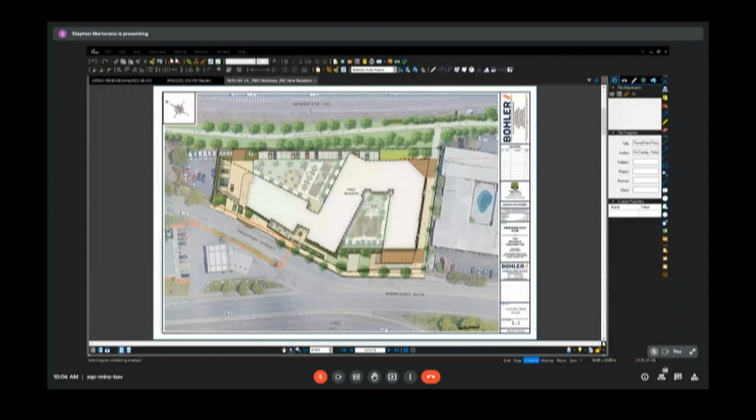So this is a top-down site plan of the project. Is everybody seeing that now? You're good. Okay, great. So proposed residential building here. This is 780 Morrissey Boulevard. To orient you, Morrissey Boulevard's on the bottom of the page. You have Freeport Street, city ownership identified by this orange line, which is currently under the custody of MassDOT, but that portion of Freeport is being actively transferred back to the city, which is why we're here today talking about the frontage along Freeport. Just to orient folks, the rest of this is under DCR's control. Morrissey Boulevard up to this point is DCR, and on the backside you can see I-93, so MassDOT's jurisdiction is on the backside of the project.

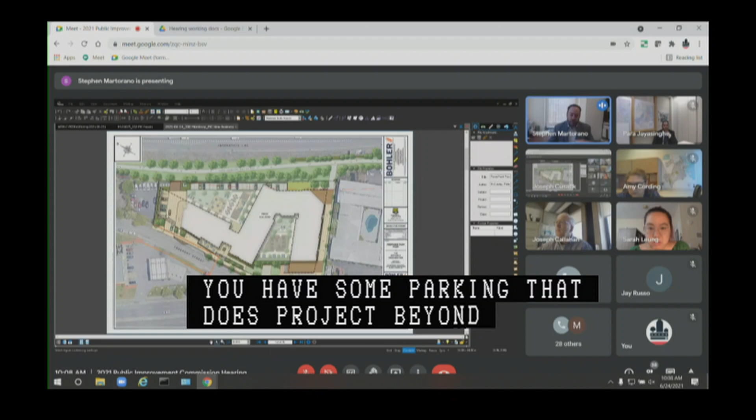The residential building here has a couple legs to it. We have some upper level podiums. These are 1 story up. Most of the parking is housed under the building here. We have some parking that does project beyond the building there, and some covered under an overhang entrance here as well.

I'm getting feedback. If folks could mute, that might be good.

The frontage today, there's not a sidewalk along Freeport Street along our frontage, so we're introducing that. So this is all new. We do require an easement, which is the first action of the agenda today. So we are proposing an easement to allow this sidewalk frontage zone to develop.

So we have street trees, a furnishing zone along the Freeport side. Then behind that, we'll have generally an 8-foot sidewalk as we connect into this portion of the property line here. It does get down to 5 feet, and I'll show you in future slides how we accommodated that tree.

This is a slightly out of date graphic. It doesn't show the 2 trees that we're maintaining for the parks conversation, but then these are all new trees that we're introducing. These ones here are in DCR jurisdiction. We are introducing a new one here in City of Boston jurisdiction. So that is an overview.

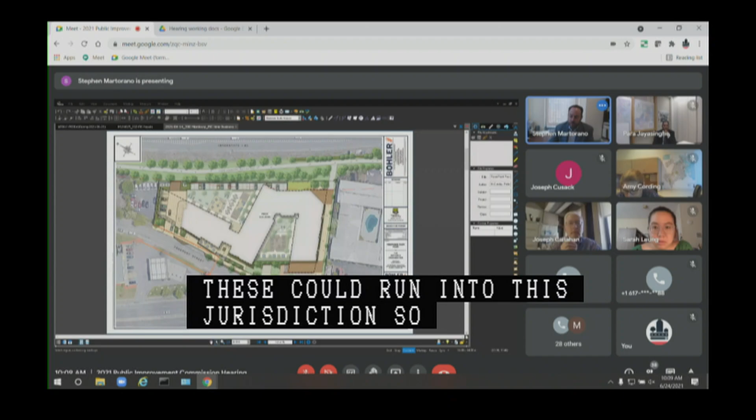We do have a blue light station that we're proposing here. We have a connection that we're proposing down this property line, and then coordinating with DOT and DCR to extend that connection to this bike lane. This is a proposed DCR DOT project here to put this bike path in. So as that comes online, we're requesting the ability to connect into that from our property as well.

And we're developing a large bike plaza area in the back adjacent to our bike room. So really trying to make this a very bike-centric project, in addition to the pedestrian accommodations we talked about along the street frontage, these connections to this multi-use path that DCR is creating.

And DCR is in the process of designing a lot of improvements to Morrissey Boulevard. Those are still under design, but we are accommodating a 10-foot sidewalk here per their request, which is the beginning of what they envision as another multi-use path right along the side of Morrissey Boulevard. So a very different area in the making, a lot of great changes coming beyond just this project. We've had lots of conversations about what the future looks like in this area. I think there's a great opportunity for a much more bike-centric environment than what you have down there today.

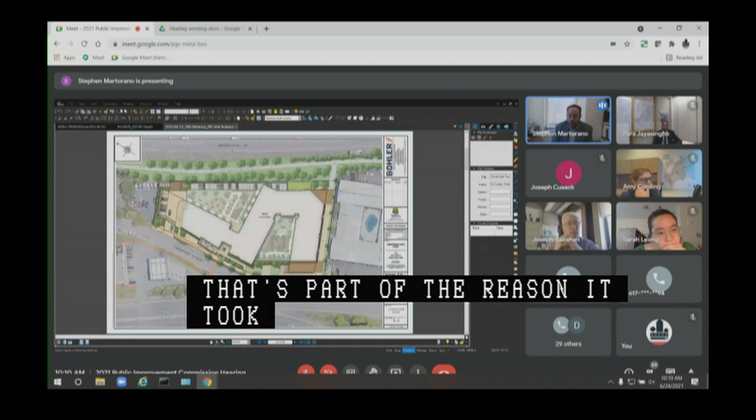So that's a broad brush overview of the project and the area, and there's a lot going on, which is part of the reason it took a while to get the details worked out on what our frontage zone wants to be. But we think we've talked to all the stakeholders and are pleased to introduce the project again and talk through the specifics with the commission today.

Thank you, Steve. If you could have your staff give the very specifics of the first item, which is the pedestrian easement. Yes, so switching slides here. Did that switch with you?

Yes, good. So, as I mentioned, to get the width we need along Freeport, we are proposing a pedestrian easement. This is the beginning of City of Boston jurisdiction, and there is sufficient width here to get the full complete streets, but as you get down, we needed a little bit of the private property in here. Looking at the dimensions, it's up to a little over 4 feet wide. Again, that's the tightest pinch point where we're trying to keep an existing tree right here. So we're pushing the sidewalk in, and we've extended it all the way to the property line, even though the sidewalk doesn't go there today.

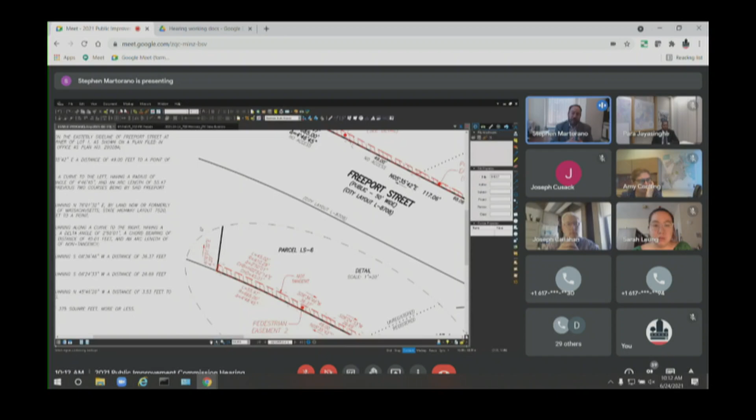You'll see that in the detailed graphics, but this would give the opportunity, if MassDOT owns this next parcel and wants to also provide a similar easement on their parcel. We just thought it made sense to bring our easement all the way there for future expansion and continue the complete streets as DOT does whatever improvements on their property. And they are doing some improvements right now in sidewalk work all along their frontage as well.

So that is the easement. We've got 94 square feet in this registered parcel, and then in the one which we're deregistering, another 375 feet. So it's just shy of 500 square feet total easement that the project is looking to grant to the city.

Thank you, Stephen. By the way, I truly appreciate your foresight and your efforts to make this project what it needs to be, taking that extra step and the due diligence. So truly appreciate that from my perspective. Comments by fellow commission members?

I just want to thank the project team for sending me the updated easement plans this morning. Okay, great. Any comments by PIC staff and or members of today's audience? No, none.

Hearing none, I'd like to hear a motion regarding the first item. I'll make a motion to approve a petition by Dorchester Michaels LLC for the acceptance of a pedestrian easement adjacent to Freeport Street as read into the record by the chair. Second. All in favor? Aye. Anyone opposed or abstain? Hearing none, motion passes.

Next item, public hearing, continued item number 2. On a petition by Dorchester Michaels LLC for the making of specific repairs within Freeport Street, a public way, Dorchester, located on its easterly side at the site of 780 William P. Morrissey Boulevard, generally northeast of Morrissey Boulevard, and consisting of curb realignment, sidewalk and roadway construction, as well as new and relocated pedestrian ramps, specialty pavement, street lighting infrastructure, storm drain infrastructure, street trees, landscaping, and driveway curb cuts.

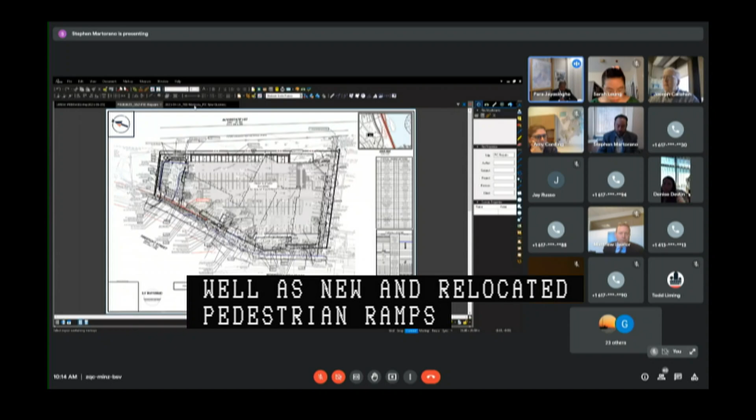This was introduced under new business on April 15 of this year. Our first public hearing was on April 29. It was continued to May 13 and subsequently continued to June 10. As shown on a set of plans entitled City of Boston Public Works Department Engineering Division, specific repair plan 780 William P. Morrissey Boulevard, Freeport Street, Dorchester, 2 sheets dated February 12, 2021 and subsequently revised to June 22nd of 2021.

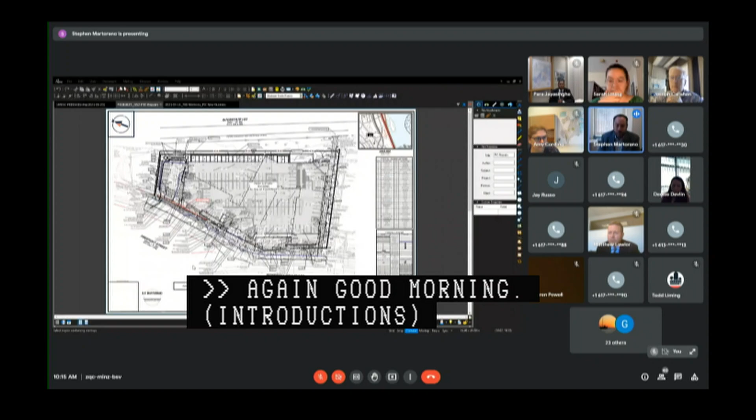On the screen, I have the PIC drawing, a little more technical than the drawing we looked at the previous agenda item, but it has the same detail. You can see the footprint of the building. Here, again, multifamily residential rental project. This is the footprint of the building. In gray, you can see a little more clearly.

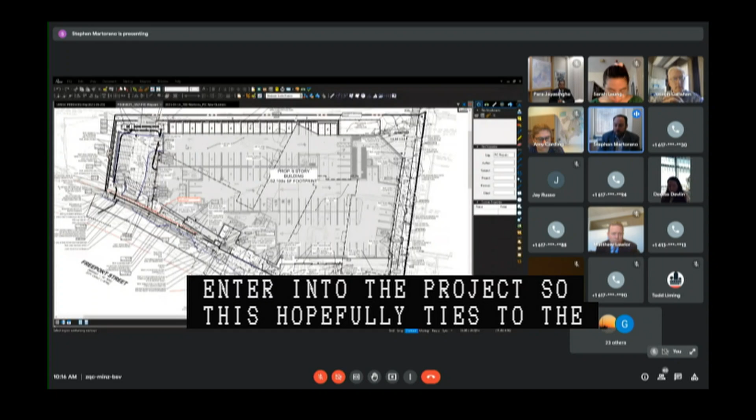This is all the underground parking, or it's really at grade, but under the building in a podium level and screened from the street. And again, a little bit of parking does project out beyond the footprint of the building, and this is a drive-through courtyard, so you enter into the project to get into the garage of the building. So this hopefully ties the graphic that we showed previously together with the more technical details of how this operationally works. And again, bike path connection and a bike plaza in the rail corner.

We do have a dog park here that is great. I think it's a great amenity for the project that also activates, as you start to see the activity from the DCR multi-use bike path, you start to get some great activity back here. And we think that dog park will be an added activity to encourage use of the pathway and make it more interactive with the buildings around.

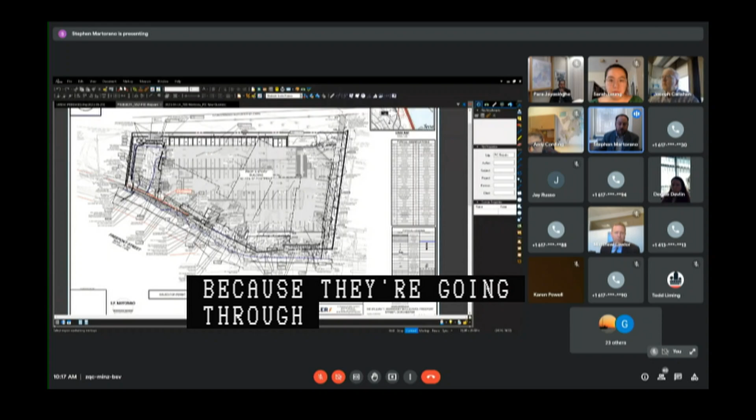Again, Morrissey Boulevard to the south here, DCR-owned roadway, and we do have a very similar approach for specific repair type items that we're trying to introduce there. Again, street trees along their jurisdiction as well. And then as we got up to this part of Morrissey, and this is more informational of the overall approach to the streetscape, up in the DCR area, they requested the trees on the back of the sidewalk, mostly because they're going to likely redo a lot of the sidewalk work we're doing when they come in with their final plan. So to give the trees the best opportunity for success in this stretch, we put them on the backside so they can be planted in permanent places, and then the DCR can do their work without disrupting those.

As you turn the corner here, we start the streetscape as you come down here, and then right at this point here is where it turns into City of Boston jurisdiction. So that's why we actually had to request DCR consider this so we could start the complete streets here and carry that along with the pervious paver strip up into the DCR, which is not a DCR standard item, but they did see the benefit of extending that streetscape just in this vicinity. So I think that was a good win.

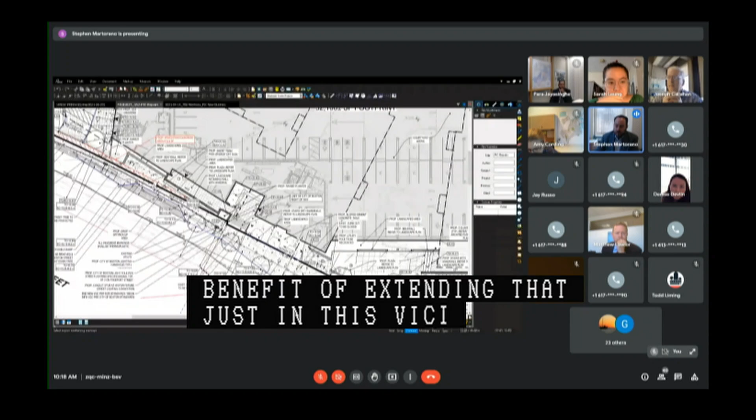And then as we come down here, we have a bump in. This is really a bus stop for a private shuttle. We're operating a private shuttle in conjunction with the hotel next door that is already running. A shuttle that goes to the Red Line, it goes to the airport, and then as the residential units come on, they're going to add some more stops to the local grocery store and other local amenities. So we provided a place for that bus to pull over and do their pickup drop-off activities, and we actually expand the sidewalk into the private property so we can get some benches and some waiting area there that is ancillary to the bus stop.

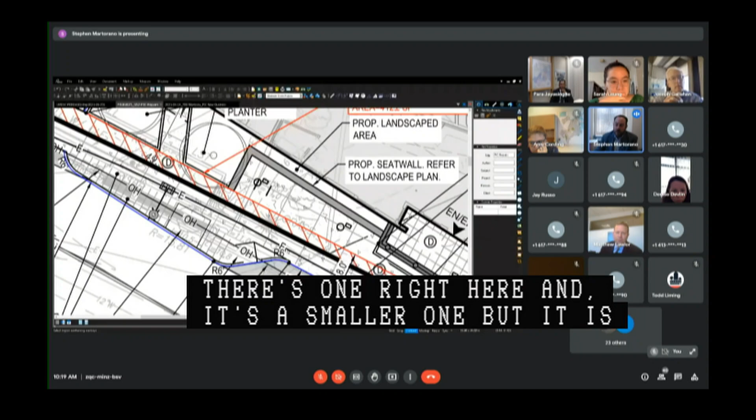But again, the red stripe is the easement that we just discussed. What this provides is 8-foot clear width sidewalks behind the bus stop. We have 8-foot clear widths the entire way through the site, and then these are 2 existing trees. There's one right here, and see it's a smaller symbol, but it is a decent sized tree that we've agreed to keep here. So we're putting a tree pit in that paver zone.

So it's an oversized tree pit. It's about 7.5 by 7.5, so almost double the size of a traditional tree pit. Again, it's a mature tree. We're trying to give it as much soil and room around that to give it the best chance of success in its new environment. And similarly, down here, another existing tree that through the parks conversation we agreed to maintain. So a similarly oversized tree pit here around that tree, but it is entirely in the paver zone.

So the paver zone will extend in this corridor here, and then on the backside, we continue the 8-foot sidewalk, but it does pinch to 5 feet here. There is a retaining wall existing today that runs along the property line. We'll be removing the wall as part of our project to put the sidewalk in, but the wall does exist along the DOT frontage, and we'll turn it back into our property. And that pinch point is 5 feet. So we're able to keep the 5-foot clear, and then 6-foot clear as you get down along Freeport Street. So that's our pinch point to meet back to existing conditions.

But again, the easement we're providing does allow 8 feet all along our frontage. And again, the easement is hidden by the wall here, but the easement does extend to the property line. So if at a point in time you get the ability to move this wall that's on the DOT property back, that sidewalk could extend without further permissions from this project. So I think it's set up well.

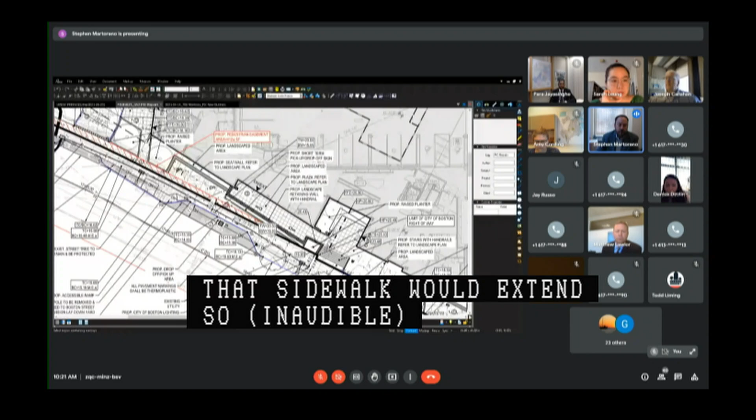The other improvements, we do have some decorative light poles at the request of the lighting department. There's traditional on utility pole lighting out there today. We're going to supplement it with a few decorative light poles. The locations were really selected by the lighting department, and we're putting in some provisions for them that include just a handhole box and a stub out. So if in the future things change in this area or they decide to bring it across the street, it just gives them some infrastructure in place to continue expanding their network as their needs come up

without fully disengaging some of the efforts that we're putting in, and the stuff that we're putting in the ground today doesn't need to be altered. They will have to dig up a portion here to get to the stub, but they don't know where it wants to go past that. So we agreed to just stub it out at this point. They'll pick it up from there in the future if needed. But the city jurisdictional line is right here. It's unlikely they go further because those would be DCR controlled lights from that point beyond. So providing the stub at their request, unclear on what that may be used for in the future.

And that's it, really. We are just talking about this zone here, and I gave you the broad strokes of what's going on there. And there is a Blue Bike station that we've offered, and that goes on our private property, but again, it will be accessed from the DCR sidewalk.

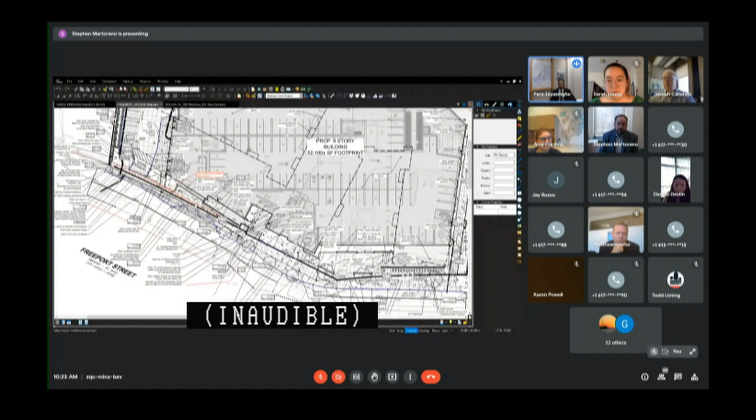Thank you, Stephen. Truly appreciate that very thoughtful presentation. Just want to amend the record to reflect that Ms. Denise Devlin, representing the Water and Sewer Commission, is attending today's hearing. So at this point, are there any questions or comments by fellow commission members regarding what was presented by Stephen?

Hearing none, Stephen, I'm going to assume that the maintenance agreement is in the works, because we are having a little bit of an audio issue with the PIC staff. And I will also further assume that everything is okay with PIC staff on this matter and that there is no one in the audience who is wishing to add testimony. Correct. Okay.

Great. All right, so at this point, I'd like to hear a motion regarding this item. I'll make a motion to approve a petition by Dorchester Michaels LLC for the making of specific repairs within Freeport Street as read into the record by the chair. Second. All in favor, please signify by saying aye. Aye. Aye. Aye. Anyone opposed or abstain? Hearing none, motion passes. Very good, thank you.

Thank you, Stephen. Third item in the public hearings continued segment of our agenda, on a petition by Verizon New England, Inc. for a grant of location with lead company status and no participants to install new telecommunication conduits with city shadow within the following public ways in South Boston: Pier 4 Boulevard, generally between address number 55 and Congress Street at Pier 4 Boulevard. This was brought under new business on May 27. First public hearing was on June 10.

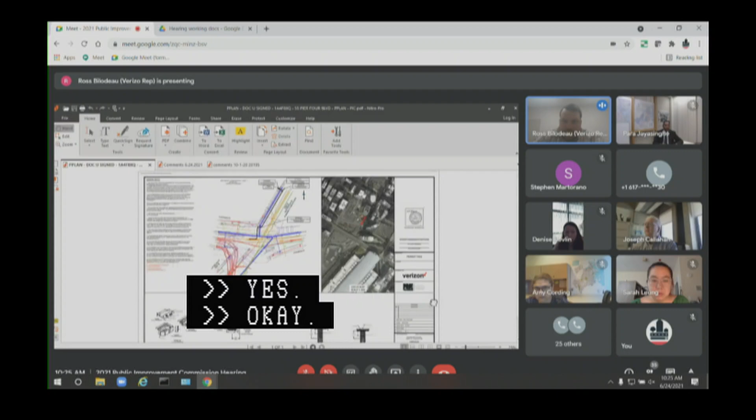This was presented again with updates 2 weeks ago. And to recap, we're running 12 new conduits, which includes city shadow, from this existing manhole 1372 up Pier 4 Boulevard to a new handhole for the new 55 Pier 4 Boulevard, with 4 of the conduits stubbing out over here, and the other city shadow in the handhole, and 4 conduits for Verizon continuing to the new building.

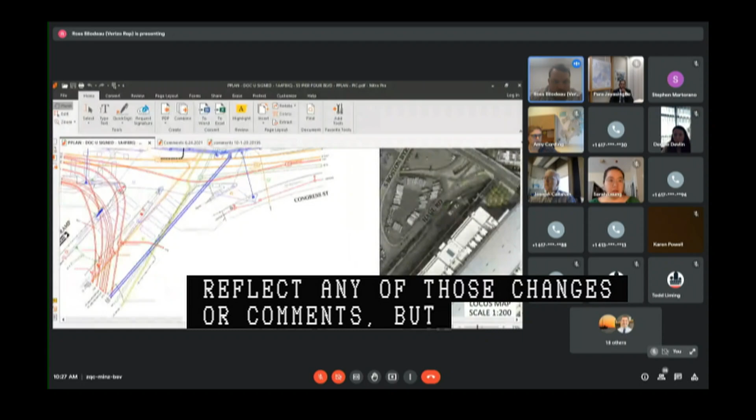As of the last hearing, Boston Water and Sewer wanted to review some changes, which were the extended stubs here. We have received comments, however, they were received this morning. So this plan does not reflect any of those changes or comments, but they were kind of minor. I was kind of hoping, because Verizon is really looking to get this project going here, hopefully pending those small comment changes, passing this one.

Ross, I always want to emphasize that the responsibility of getting timely review is on you and not the PIC Commission member staff, okay? Because all of that homework was supposed to be done before you brought this thing under new business. So any and all time afforded by any commission member and or their staff is part of the business, because I'm sure they have much work to be done. Whether you receive the comments this morning or not is of no consequence, at least for me. So that being said, Ms. Devlin, it is your choice as to whether you want us to proceed with the plans as shown on the screen. Oh, yes, good morning.

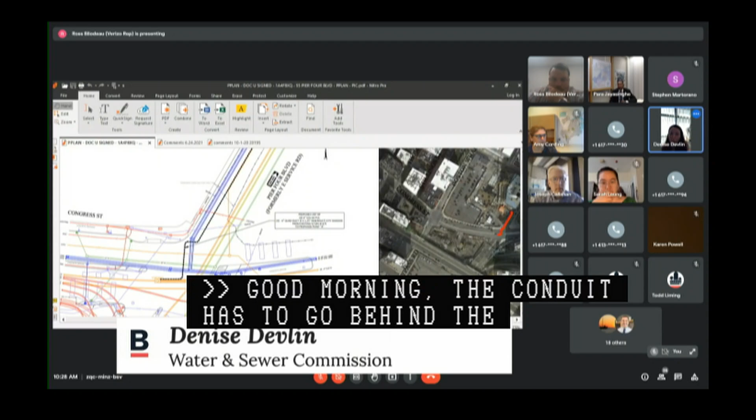The conduit has to go behind the water main, and it's actually showing in front. So it'll be showing to the right on the plan instead of to the left at the bend there. So the plan that is shown here, we don't want that. I do want to mention something for Ross. I know we are going to have changes to our administration.

So what I was told is, even though there are changes that are presented at PIC, BTD and other agencies look at this and they may have changes from what we approve. I was told that the petitioners, if there are changes, do have to go back to the Engineering Customer Services Department and get it approved before it gets finalized at PIC. So you have to go through the process of getting the stamped copy and the CAD file, the final approval, before it gets finalized at PIC.

So I just wanted to mention that, because we just have to enforce that. And I know sometimes at the meetings, if the layout gets changed, it gets looked at quickly by us and gets approved, but what I just mentioned about going back to Engineering Customer Services, we do have to enforce that.

Okay, sure. I did have information sent to me that this was approved by Boston Water and Sewer on December 18th of 2020, as it was back then. All the minor changes, I understand that's the process, so we'll have to live with that. Yeah, and I apologize too, to have you go back and forth, but we do have a new administration now, and that may change later on, but that is the new process. So, thank you, I appreciate it. Okay, thank you. Ross, truly appreciate your understanding of the various dynamics.

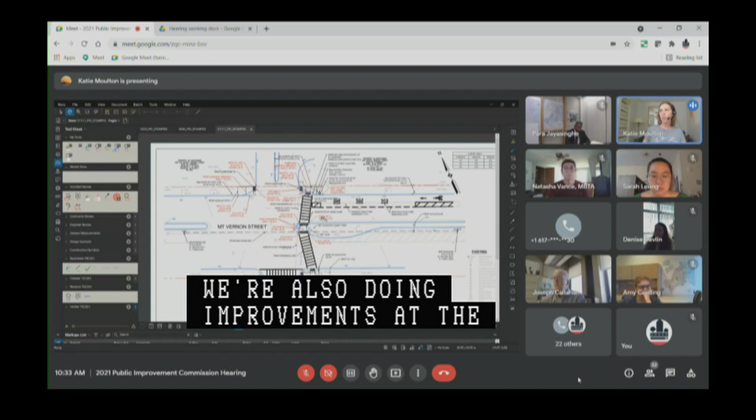So the location we are looking at is Mount Vernon Street at Bayside Expo. And as we discussed 2 weeks ago, we're doing some minor modifications to the curb ramps at the entrance to Bayside Expo to create ADA accessible crossings. We're also doing improvements at the center median to create a safe refuge island. And as well on the opposite corner, again, to create 2 safe ADA compliant wheelchair ramps for the bus stops at Mount Vernon Street and Bayside Expo.

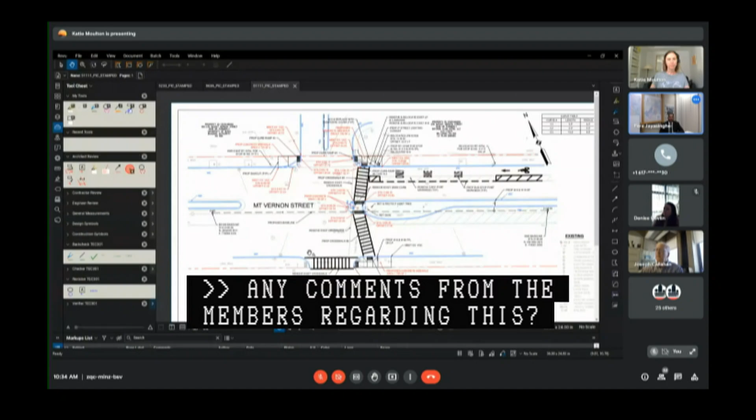Is there any other information you need from me? That's what I tried to find out, Katie. Any comments by fellow commission members regarding what Ms. Moulton has presented? Hearing none. I guess my one question is the ramp on the opposite side, there's one ramp missing here. Is that because it's compliant already? This ramp right here? Yep. Yes, this is already a compliant ramp, correct. Can you just label it as compliant? Yes, we can do that, Amy. Thank you, Amy. Any further comments by commission members?

Hearing none. Todd, how is your connection? Are we still good on your mic, or are we still challenged? Now good. Awesome.

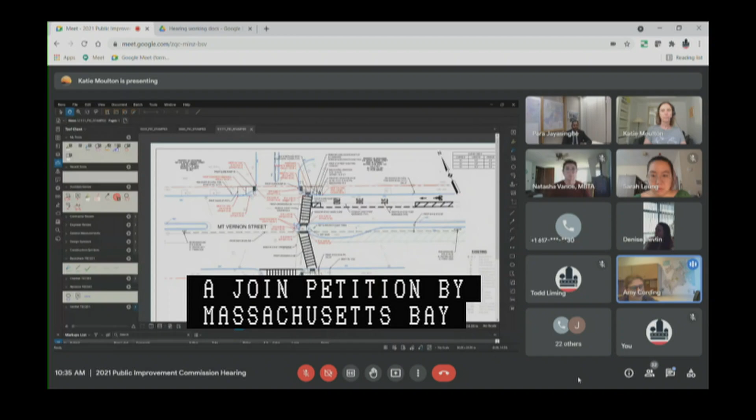So I'm assuming staff is fine, and also assuming that there are no other comments by members of today's audience. I'd like to hear a motion regarding public hearing item number 1. I'll make a motion to approve a joint petition by the Massachusetts Bay Transportation Authority and the City of Boston Public Works Department for the making of specific repairs within Mount Vernon Street, as read into the record by the chair. Second. All in favor, please signify by saying aye. Aye. Aye. Anyone opposed or abstained?

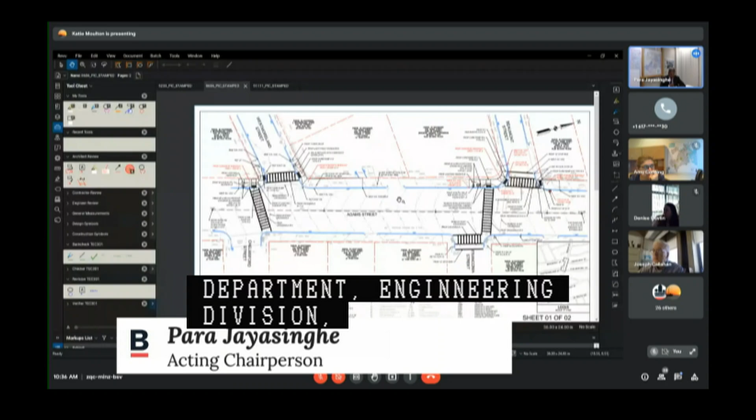Hearing none, motion passes. Next item, public hearing number 2, on a joint petition by the Massachusetts Bay Transportation Authority and the City of Boston Public Works Department for the making of specific repairs within the following public ways in Dorchester, consisting of curb realignment, sidewalk reconstruction, as well as new and relocated pedestrian ramps, street lighting infrastructure, and storm drain infrastructure: Adams Street between Westmoreland Street and Beaumont Street, Westmoreland Street at Adams Street, Beaumont Street at Adams Street. This was brought under new business on June 10th of this year, as shown on a set of plans entitled City of Boston Public Works Department Engineering Division Specific Repair Plan, Adams Street at Westmoreland Street, Boston, 2 sheets dated May 2021.

Good morning, committee. Again, my name is Katie Moulton. I'm with WSP, here representing the MBTA on the PATI Accessibility Project. The location we are looking at here is Adams Street between Westmoreland and Beaumont. And as with the PATI projects, we have been improving wheelchair ramps and sidewalk reconstruction to improve accessibility at all

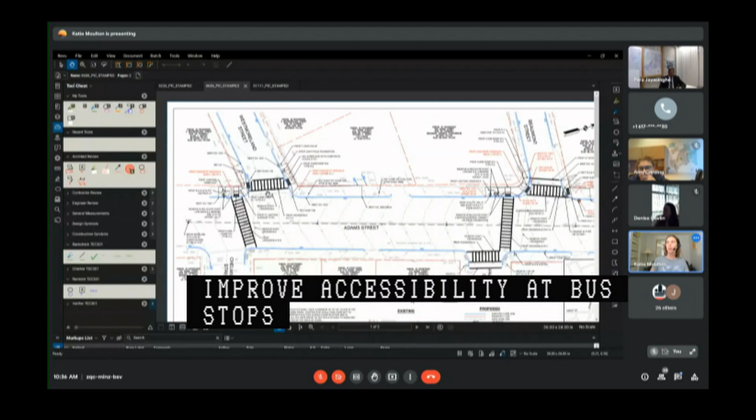the MBTA bus stops. At Westmoreland Street, we will be creating new accessible ramps across Westmoreland and again across Adams Street. The ramps here at Chelmsford are already ADA compliant. Similarly, at Beaumont Street, we are creating a new bump out on the corner of Beaumont to be able to create an ADA accessible ramp with a level landing. We have a crosswalk here. We have a new drop inlet to bring the drainage away from the crosswalk at this location.

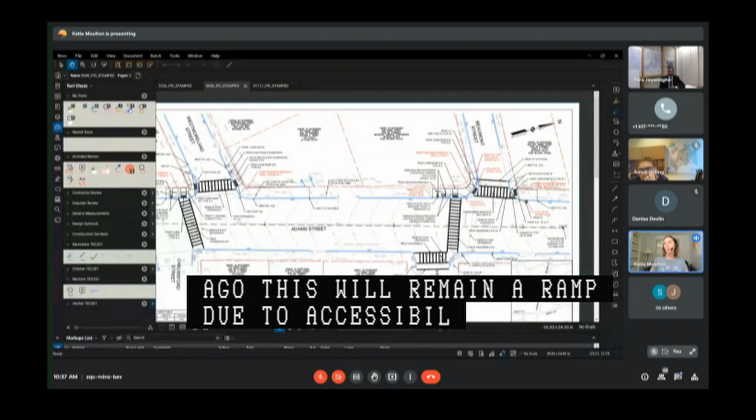And at the corner of Franconia Street, as we discussed 2 weeks ago, this will remain an apex ramp due to accessibility reasons that make it almost impossible for us to create 2 perpendicular ramps. And we have submitted documentation from the ADA committee that this is acceptable at this corner. Thank you, Katie. Comments by commission members? Can you label the compliant ramps as compliant? Yes, we will do that, Amy.

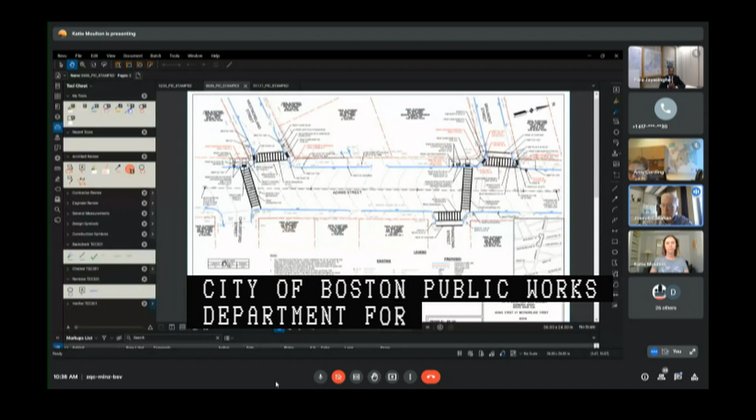Any further comments by commission members? Hearing none. Comments by PIC staff and or members of today's audience? Hearing none, I'd like to entertain a motion regarding this item. I make a motion to approve a joint petition by the Mass Bay Transportation Authority, the City of Boston Public Works Department, for the making of specific repairs in the area of Adams Street, Westmoreland Street, and Beaumont Street, as further read into the record by the chair. Second. Second. All in favor, please signify by saying aye. Aye. Aye. Anyone opposed or abstain? Hearing none, motion passes.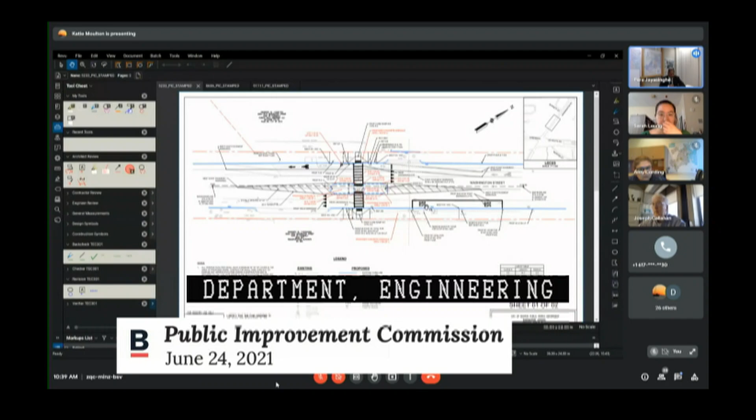Third item on today's agenda, on a joint petition by Massachusetts Bay Transportation Authority and the City of Boston Public Works Department for the making of specific repairs within Washington Street, a public way, West Roxbury, located generally at address numbers 3589 through 3615, north of Arborway, and consisting of curb realignment, sidewalk reconstruction, as well as new and relocated pedestrian ramps, storm drain infrastructure, and a median island.

This was brought under new business on June 10th of this year, as shown on a set of plans entitled City of Boston Public Works Department, Engineering Division, Specific Repair Plan, Washington Street, opposite Barnett Street, Boston, 2 sheets dated May 2021. Katie. Good morning again, everyone. My name is Katie Moulton. I am with WSP representing the MBTA on their PATI Accessibility Project.

This location is Washington Street at the Metromark apartment complex. We are creating a new compliant crossing with a safe refuge island in the middle. These are all new ramps that do not currently exist at this location with the existing bus stop. And I believe that's it. Sorry, thank you, Katie. Any comments by commission members?

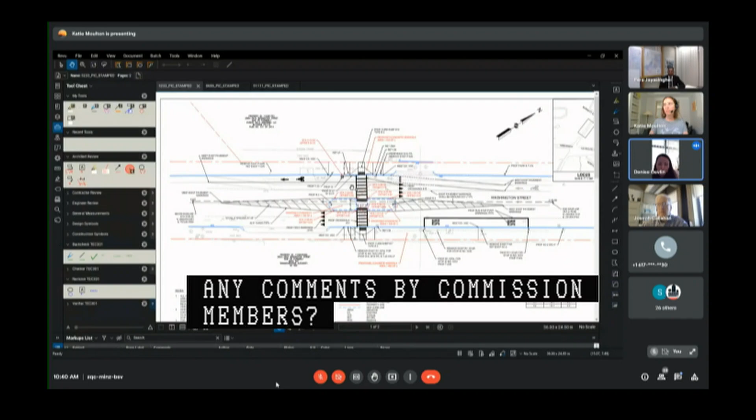Oh, good morning, Katie. There was just a really minor comment we realized that we missed when we looked at these plans. So it's the same sheet, right where your arrow is, up there, it says proposed concrete sidewalk. So to the right of that, it says retain drain manhole and then retain catch basin. Yes. So the retain drain manhole should read retain sump, and then the retain catch basin should read retain

drop inlet. And if you prefer, I could just send you that quickly in an email right after the meeting, if that's okay. That's fine. It's just some nomenclature up here you would like us to change. Oh, yes, that's it. Okay. Unfortunately, of course, the crossing is right at the low point of the roadway. Yeah, thank you, Katie. Of course. Thank you, Denise. Any further comments by fellow commission members?

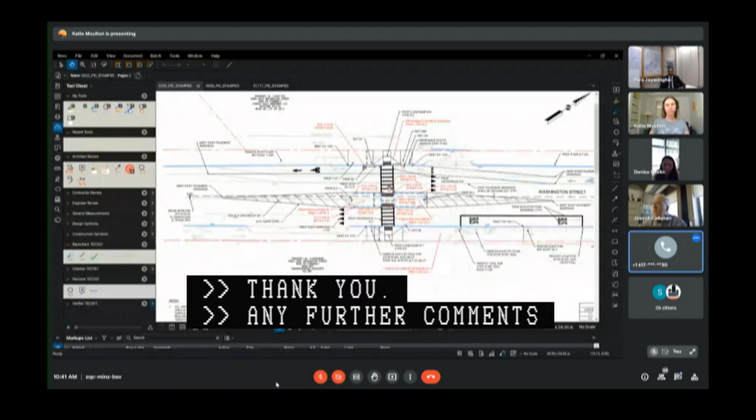Hearing none. Again, assuming that PIC staff is fine with public hearing number 3, and assuming that there are no comments by members of today's audience, I'd like to hear a motion regarding public hearing number 3. I'll make a motion to approve a joint petition by the Massachusetts Bay Transportation Authority and the City of Boston Public Works Department for the making of specific repairs within Washington Street as read into the record by the chair.

Second. All in favor, please signify by saying aye. Aye. Aye. Anyone opposed or abstain? Hearing none, motion passes.

Next item on today's agenda, public hearing number 4 on a petition by ExteNet Systems Inc. for a grant of location with lead company status and no participants to install new telecommunication conduits with City Shadow within the following public ways in Dorchester: Talbot Avenue between address number 52 and Blue Hill Ave, Blue Hill Avenue between Talbot Avenue and Harvard Street, west of Blue Hill Avenue.

This was brought under new business on June 10th of this year, as shown on a set of plans entitled City of Boston Public Works Department, Engineering Division, Grant of Location Plan, Talbot Avenue, Blue Hill Avenue, Harvard Street, Boston, 6 sheets dated May 2021.

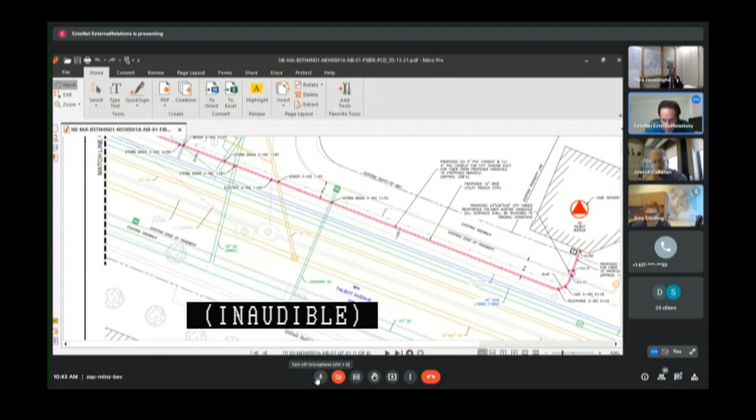David, could you hold on? I think it's our DoIT folks, Joseph Callahan. If you can mute that. So your audio is really garbage. I don't know if that's what you said about mine. I'm sorry, so are the plans up now on your screen? Yes.

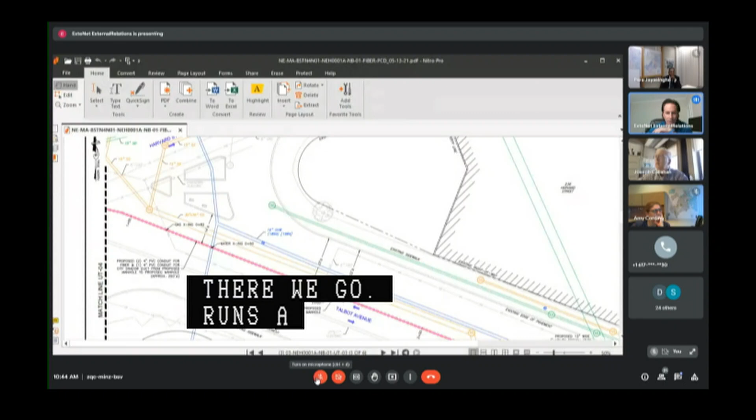Okay, great. Yeah, so as you mentioned, ExteNet is seeking a grant of location for telecommunications fiber conduit. So I'll just go through the run here. We're starting on Talbot Ave out of the hub, approximately 1,042 feet. Runs north-northwest along Talbot. Gosh, I'm having trouble with this presenting screen. There we go. So, yeah, it runs along Talbot. We hit the intersection at Harvard and Blue Hill Ave, where it turns south. Here we go. Ends here. There it would step aerially to service future small cell communications facilities.

So, I'm trying to think, not too many comments from the last hearing from 2 weeks ago. I think there was some concern about possibly impacting some of the traffic sensors at the intersection. I think we alleviated those. We're aware of some street lighting laterals in and around this area, the islands at the intersection, so we're aware to be cautious of those when digging. Beyond that, these were updated with additional details about the city shadow duct. A handhold was added at the start of the run in the sidewalk on Talbot. And I think that pretty much covers it.

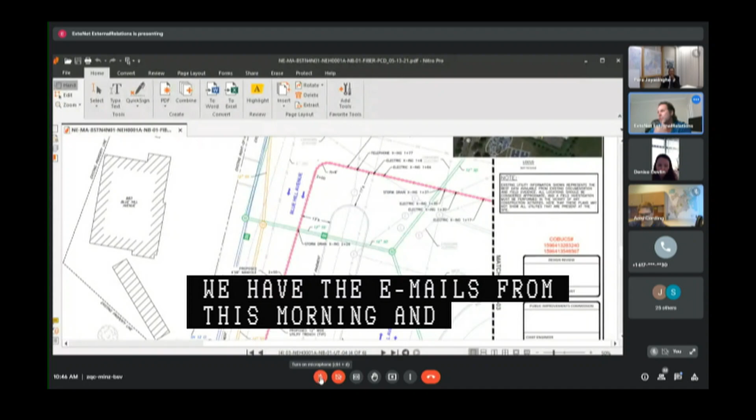Denise, if you're on, I got your email this morning, so thanks for reviewing the newest set. No additional comments. We'll get you hard copies and the CAD next week. All right, thank you, David. Yep. Yeah, so with that, open to any questions or comments on these.

Thank you, David. Any comments by commission members? Hearing none. Let me check my PIC staff. My PIC staff is good on this item and there is no public testimony. So at this point, I'd like to hear a motion regarding public hearing number 4. I'll make a motion to approve a petition by ExteNet Systems for the grant of location in Talbot Ave, Blue Hill Ave, and Harvard Street as read into the record by the chair.

Second. All in favor, please signify by saying aye. Aye. Aye. Aye. Anyone opposed? Hearing none, motion passes. Public hearing number 5 on the petition by TC Systems Inc.

for a grant of location with lead company status and no participants to install new telecommunication conduits with city shadow within the following public ways in Boston proper: Kilmarnock Street, generally between Boylston Street and Peterborough Street, Boylston Street and Kilmarnock Street. This was brought under new business on June 10th, as shown on a set of plans entitled City of Boston, Public Works Department, Engineering Division, grant of location plan, proposed lateral micro placement, Kilmarnock Street and Boylston Street, Boston, 3 sheets dated March 3rd, 2021, and revised June 2nd, 2021.

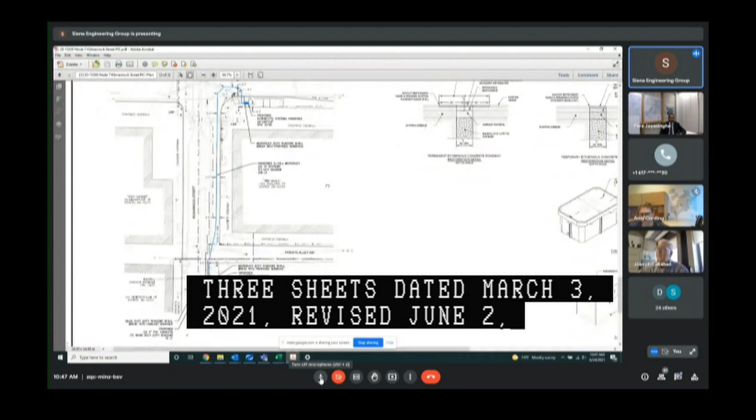Good morning, everyone. This is Adam Heller from Sierra Engineering Group, representing TC Systems for this petition. I'm going to share my plan here, so let me know if everybody can see. You're good. All right. So this is a petition to install a telecommunications conduit on Kilmarnock and Boylston Street. We did receive comments from Boston Water and Sewer this morning, just regarding the position of this proposed manhole. They've asked that we move the manhole slightly further out so that we maintain 4 feet of distance from this catch basin. Other than that, the other comments were basically just nomenclature.

They said a couple additional lines to call out that may have been missed on the original print. But other than that, the running line has stayed the same. I reviewed last week that we made a change up at the intersection of Kilmarnock and Boylston to get this handhole outside of the ADA ramp. So we made that change to accommodate that request. Other than that, I would be happy to take any questions.

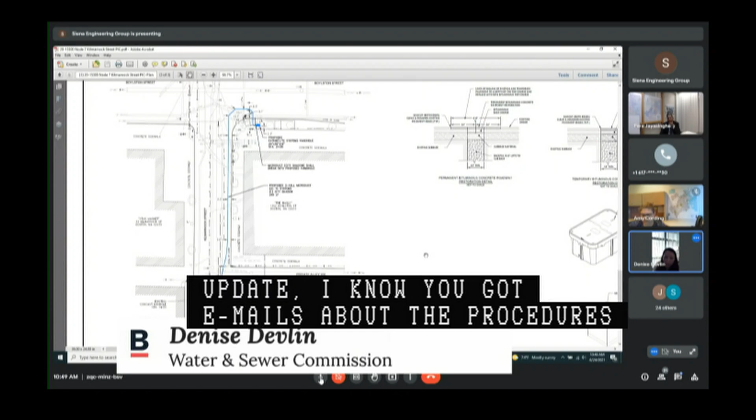Thank you. Denise, are you okay with the responses from the petitioner? Oh, yes, that's fine. I just wanted to make sure that when we get the plan updated, I know you got the email from us, Adam, this morning about the procedures, to get the approval done, engineering customer services, for any little changes like this, just go through the normal process. So once it's final, you can just send us the CAD file and the 4 plans for a stamp copy.

Sure. So I suppose my question for you, Denise, would be, are we able to have this passed, assuming all other parties are okay? Or do we need to push this 2 additional weeks to after Water and Sewer approves the final plan? No, the location for the grant of location is fine. The only comment, like you mentioned, was just the traffic signal. Okay, great. Thank you very much. Appreciate that. We just want to have all the other comments addressed, like you mentioned, with the services. Yes. Thank you very much. Thank you, Denise.

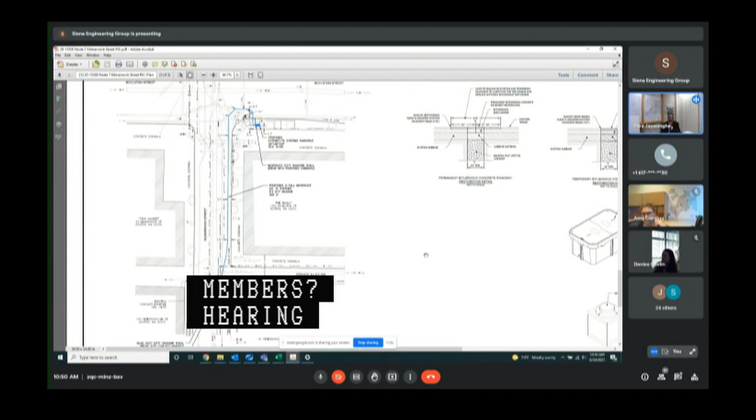Any comments by fellow commission members? Hearing none. I think we're all set. Assuming PSC staff is fine with this hearing, and there is no one else in the audience for public testimony, we have to get a motion regarding this item. I'll make a motion to approve a petition by TC Systems for a grant of location in Kilmarnock Street and Boylston Street as read into the record by the chair. Second. All in favor? Aye. Aye. Anyone opposed or abstaining? Hearing none, motion passes.

Last item on today's public hearing segment, public hearing number 6. On a petition by TC Systems Inc. for a grant of location with lead company status and no participant to install new telecommunication conduit within Ipswich Street, a public way, Roxbury, located at address number 30, generally between Charlesgate East and Boylston Street, Hemenway Street. This was brought on as new business on June 10 of this year, as shown on a plan entitled City of Boston, Public Works Department, Engineering Division, Location Plan, Proposed Lateral Conduit Basement 30, Ipswich Street, City of Boston, one sheet dated April 20th of 2021.

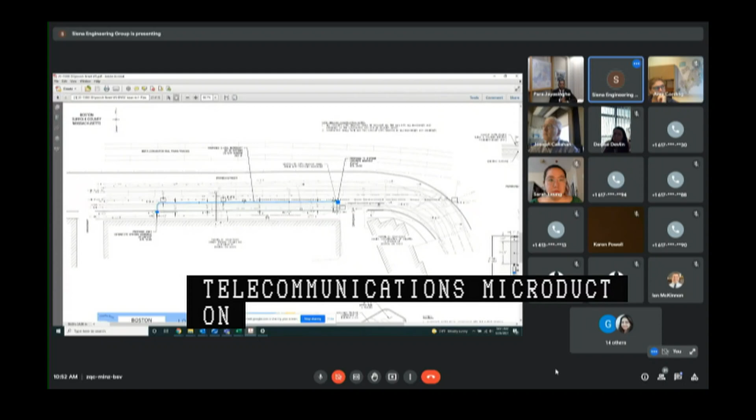Thank you. Once again, this is Adam Heller from Sierra Engineering Group, representing TC Systems for this petition. This is a petition to install telecommunications microduct on Ipswich Street. Boston Water and Sewer got back to us this morning, no additional comments, so we're all set here. We had originally changed this angle so that we cross the water and sewer at a 90-degree angle, and the PIC had originally asked that this manhole get moved slightly out of this driveway, so we accommodated all of those changes. Other than that, this should be a quick installation, just about 200 feet of microducts. Should be in and out in a day or two, and I'd be happy to take any other questions. Thank you, Adam. Comments, concerns by Commission staff?

Hearing none. PSC staff is fine with this item, and there is no one to add additional testimony from today's audience. That being said, I'd like to hear a motion regarding public hearing number 6. I make a motion to approve a petition by TC Systems Incorporated for a grant of location at Ipswich Street, as further read into the record by the chair. Second. All in favor, please signify by saying aye. Aye. Aye. I'll abstain. Motion passes. Thank you, Adam. Thanks a lot. That closes the public hearing segment of today's agenda.

Now moving on to the new business portion of today's agenda. First item, 249 Corey Road, Jordan Road, Brighton, a pedestrian easement and specific repairs on a set of joint petitions by Corey Realty Ventures Nominee Trust and Jordan Realty Advisors LLC. Good morning, everyone. My name is Bert Corey. I'm with DGT. I'm also with Joe Lasano of DGT. We're the civil engineers for this particular project. Let me just give you a brief overview of this.

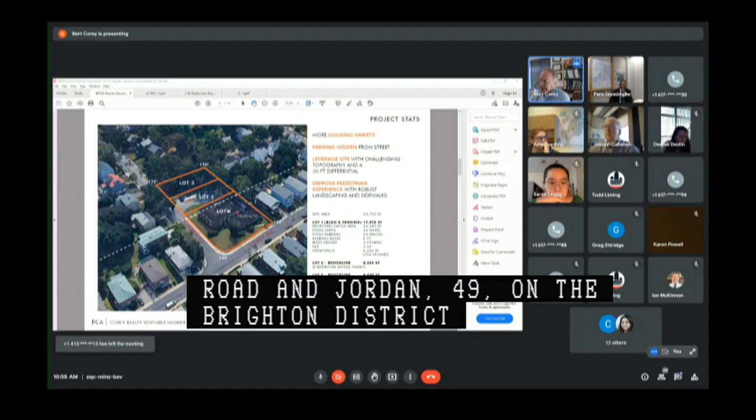Okay, very good. So the subject property is 249 Corey Road. It's at the corner of Corey Road and Jordan in the Brighton district. The property itself consists of 3 lots. The lot that we're talking about is lot 1. The applicant as well as the petitioner owns all 3 lots that are shown in this screen. The dash line represents the line between the city of Boston and Brookline.

Right now, there's an existing 2-story brick building there. It's vacant. It used to be the Corey Hill Nursing Home. The project is really to demolish this building and build a 4-story, 34-unit residential apartment building with a garage that is below grade or somewhat below grade. The challenge of this site is that it's fairly steep.

Matter of fact, I'll back up 1 second here. On this screen here, you can see this is Corey Road, this is Jordan Road, this is the existing facility. You get an idea of the slopes that are coming down through here. They're about 10% on the roadways and a little bit more on the walkways, which we'll talk about in a little bit.

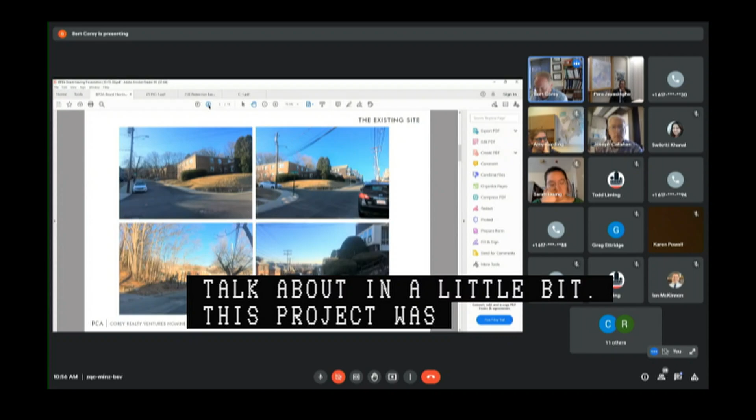This project was presented to the BPDA back in October of last year. The review was finished up, and what's pending right now is the certification of approval. It also went through zoning, and it's past the appeal period for that. It was also submitted to Boston Water and Sewer, and the site plan was approved back in May of 2021 of this year. And that was primarily for the utilities and the stormwater management that's associated with it.

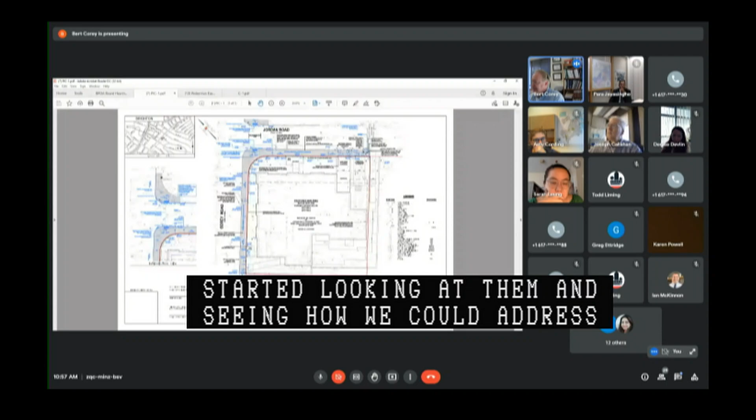So we sent out the drawings to the city agencies as well as the public utilities and received all of the comments. Once we received all of those, we started looking at them and seeing how we could address them. The plan that you have in front of you shows the site itself as well as the specific improvements that are going to occur along Corey Road and Jordan Road.

One of the points that was brought up by the Public Improvement Commission staff was asking for a 7-foot wide sidewalk. And at some points along the property, especially on Corey Road, the sidewalk was a little less than 7 feet. So what we're also proposing is a pedestrian easement plan, which extends that into the property about a half a foot. And with that, we're able to get a minimum of 7 feet on the sidewalk area along Corey Road and Jordan Road.

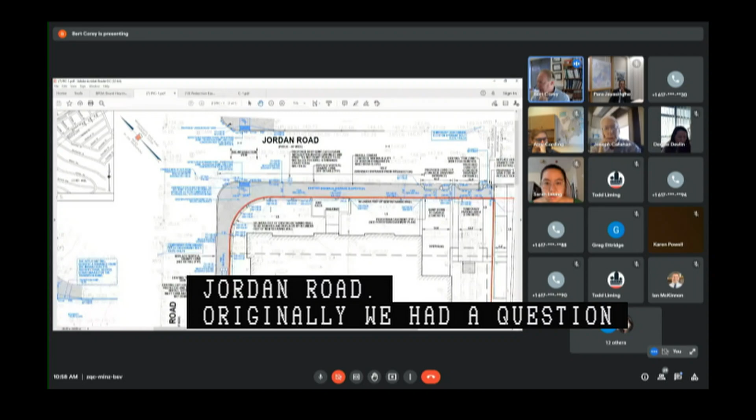Originally, we had a driveway entrance that was 14 feet in width on the inside of the D-stones. It was brought up by a couple of the agencies to reduce that to 12 feet, so we have reduced it. It's shown in this plan as being reduced inside the D-stones.

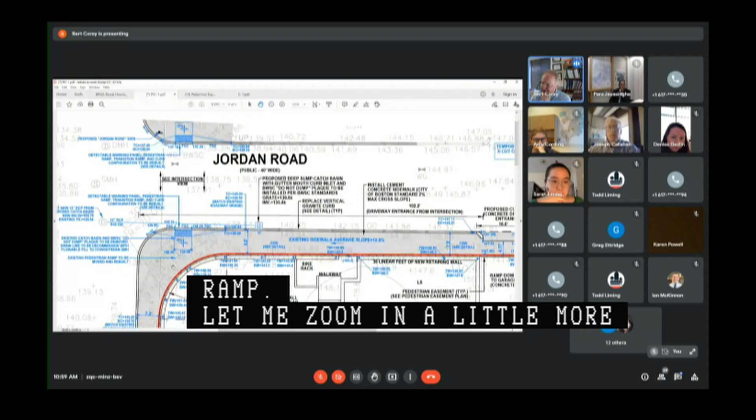And then we also received comments that go back to a terrific discussion that I had with Sarah Leung at the Disabilities Commission, and then we received several other comments with regards to Corey Road and Jordan Road and what we could possibly do with the curb line that was existing. Right now, the curb line that's there is a 26-foot radius with an existing pedestrian ramp. Let me zoom in a little more for you. This ramp comes out on an apex type of configuration today. Likewise, the reciprocal ramp also comes out on an apex configuration.

With the comments that we received from BPDA about tightening up the curb line in Corey Road, we went from a 26-foot radius to a 10-foot radius, which obviously extends the sidewalk in that area. There was also a comment from Boston Water and Sewer to construct the catch basin, there's an existing catch basin here today, as a gutter mouth inlet. And due to the location of that existing catch basin in relation to the pedestrian ramp, it really wasn't amenable to a gutter mouth simply because it was on a transition curb.

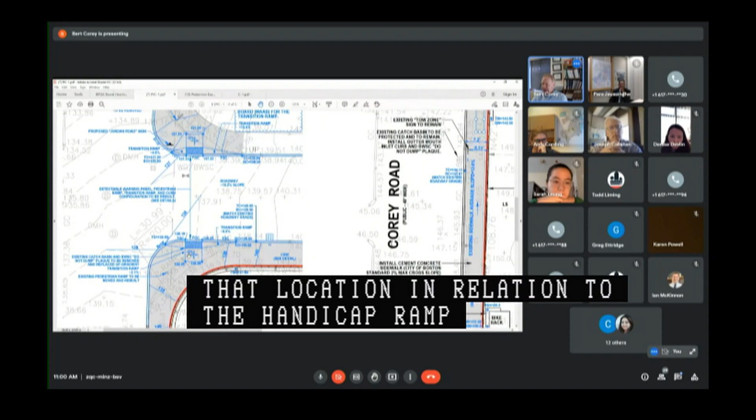So taking those comments into effect and also listening to Sarah and what her comments were, we tightened the radius. We are proposing a new catch basin with a gutter mouth that will be upgradient of this ramp.

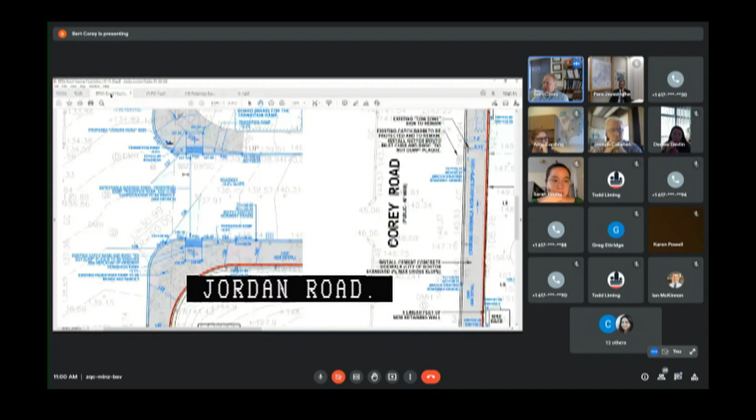However, when we have a 10% slope and another 10% slope coming down, you can see the issue that we're dealing with here, where it's just such a slope. It's hard to cut into that and create a level landing area, and then have to chase back to the upstream sidewalk as well as the downstream sidewalk. So, in order for us to modify this pedestrian ramp, we can easily get the tactile warning strip and a level landing ramp there.

But it's the transition ramps that get a little steep, and that's going to require a variance from the MAAB on that. So we'll be applying for a variance for that. There's no way around it. We can't change the grades that are already there. The sidewalk itself, due to the shorter distance on the roadways, actually gets up to about a 16% slope.

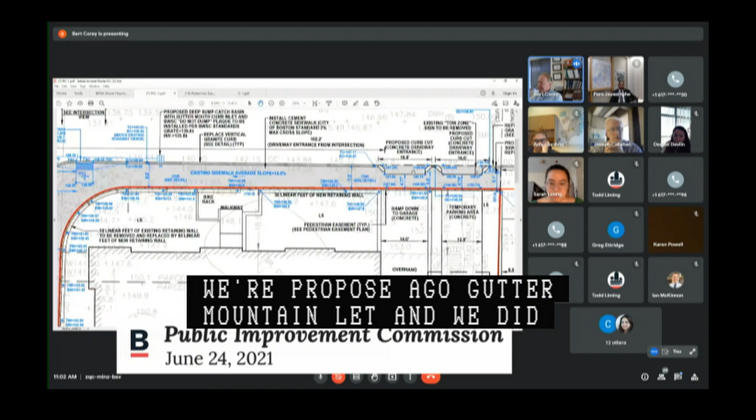Let's see, so we have ramps, the sidewalks are more than the 7 feet as requested. We are proposing a gutter mouth inlet, and we did reduce the entrance to the driveway. This is a ramp that goes down into the below grade parking area. Whereas this driveway here is really primarily for deliveries, drop-offs, the UPS, FedEx, Amazons of the world, as well as trash removal. That's it in a nutshell.

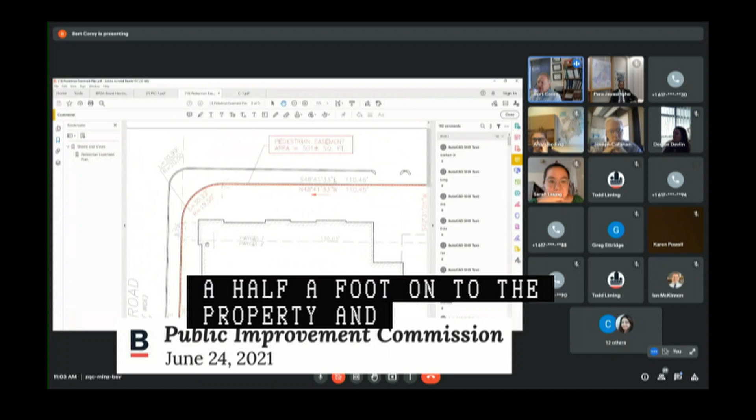The pedestrian easement: what we're providing here is an easement that extends a half a foot onto the property, and it extends along the entire frontage on Corey Road as well as Jordan Road to facilitate the widening of that sidewalk. The back side of this pedestrian easement is the proposed retaining wall. There's an existing retaining wall there today. There's also another retaining wall that will be proposed in its place. That's it in a nutshell.

Bert, thank you. A couple of observations. The road that you are giving that 6-inch easement, normally our 40-foot layout roadways should have 7-foot sidewalks. So I'm not sure exactly what the heck happened over here, but we truly appreciate you doing what you can do to ensure that our sidewalks do have the 7-foot. So appreciate that point.

And Bert, the relocated gutter, the stormwater entrance, since you said that both streets are coming down at a 10% slope, will the water that is coming down Corey Road make its way to the new gutter inlet? Because I'm concerned about water puddling at the foot of the two roads, Jordan and Corey.

Yes, the proposed gutter inlet was really to replace an existing catch basin in this location. This is receiving water that's coming down Jordan Road at that 10%. There's also, which I neglected to mention, another catch basin on Corey Road. Again, Corey Road sloping down towards the upper portion of the page at 10%. This will collect the water that's coming off of Corey Road. There'll be a small percentage of water along this gutter line that will also follow the gutter line and continue down Corey Road. Probably easier to show you on this.

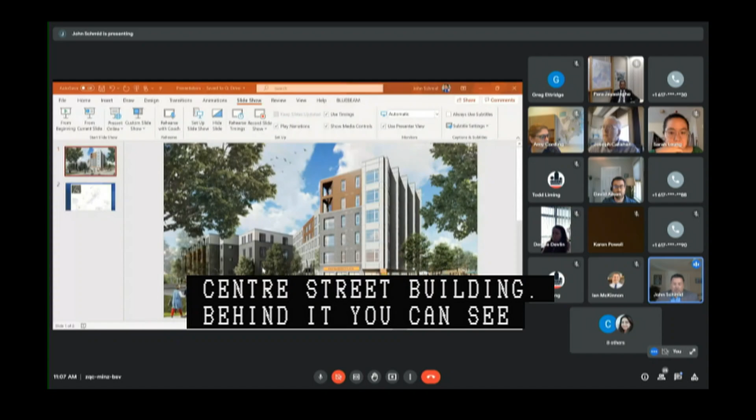John Schmid with Nitsch Engineering on behalf of the Community Builders at 250 Centre LLC. This is the proposed 250 Centre Street building. Behind it, you can see 25 Amory Street, which is currently under construction. As you may recall, the redevelopment of Jackson Square started back in 2008, and these are two of the final buildings that will complete the project in this block, the Site 3 block.

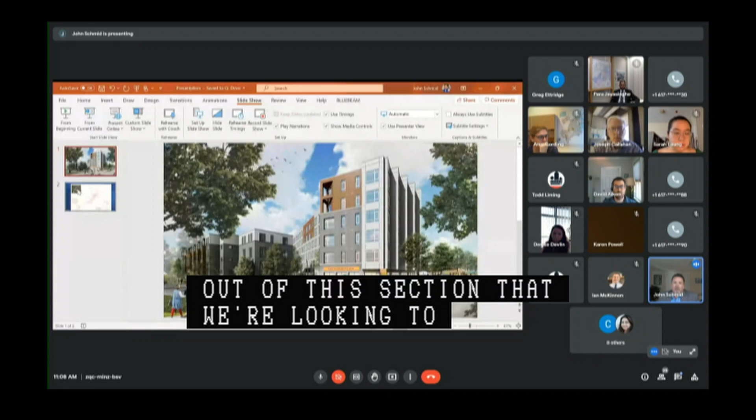The area where Amory Street now extends, if you can follow my cursor, comes down and basically it dead ends here, and from here to Centre Street, there is a sidewalk that was designed and constructed back in 2010. And at that time, the city actually did the laying out of this section of Amory Street Extension that we're looking to discontinue today. If I may go to the plan now. So can you see this okay?

So the intent is that we're going to discontinue about 432 square feet of the Amory Street Extension layout. And that will allow for the building that I showed in the previous slide to be constructed. Presently, the building encroaches about 7 feet with some cornices and other things into the layout of Amory Street Extension. So discontinuing this 10-foot width, which consists of 432 feet, will allow the building to go forward.

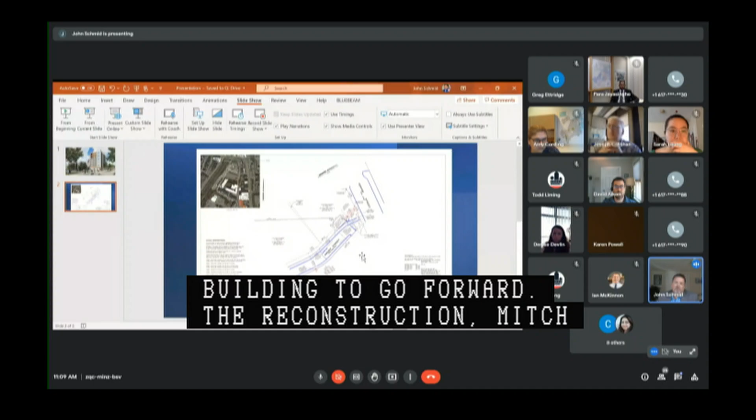In regards to the reconstruction of Amory Street, Nitsch Engineering is under contract with Boston Public Works and submitted 25% drawings to the city about a month ago, which are currently under review. Our intent is to permit this through the Public Improvement Commission as specific repairs in the fall of 2021. Does anyone have any questions?

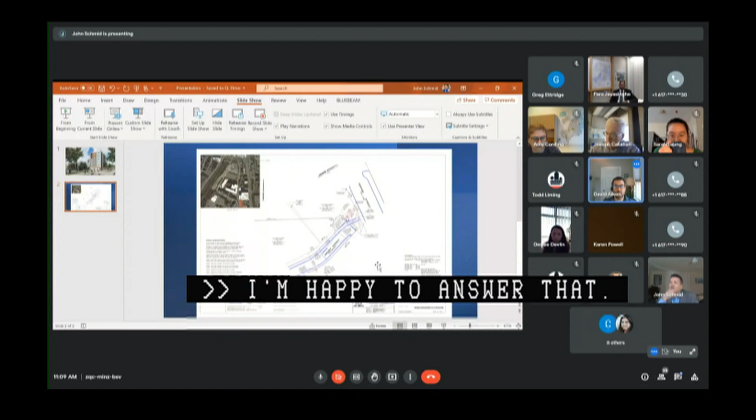John, who has the underlying fee ownership of the land that is under discussion? Is it the MBTA? And if so, where are we on that? Yes, so, David, do you want to speak to that? Yeah, I'm happy to answer that, Commissioners. The MBTA has the underlying fee ownership. We are in the process of, any day now, completing the purchase of that 1,000 square foot parcel from the MBTA. So 250 Centre Street LLC will own that very shortly.

David, I'm sure you know that the commission cannot take any action until all of that paperwork gets resolved. Are you of the opinion that such paperwork or your conversations with the MBTA will be resolved in 2 weeks, or should we go for a longer time? No, we would appreciate having the hearing in 2 weeks, and we should be able to provide that paperwork to the PIC beginning of next week. Okay, just get this stuff over to the PIC staff in a timely manner so that they are not stressed in having to review this stuff overnight. Absolutely.

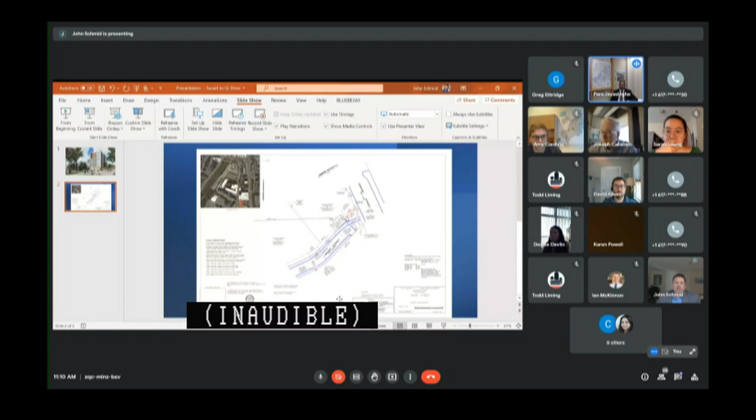Any comments by fellow commission members? Hearing none, and assuming that PIC staff is okay with things and that there is no one in today's audience who has comments, we will mark you up for 2 weeks. That will put us to July 8th.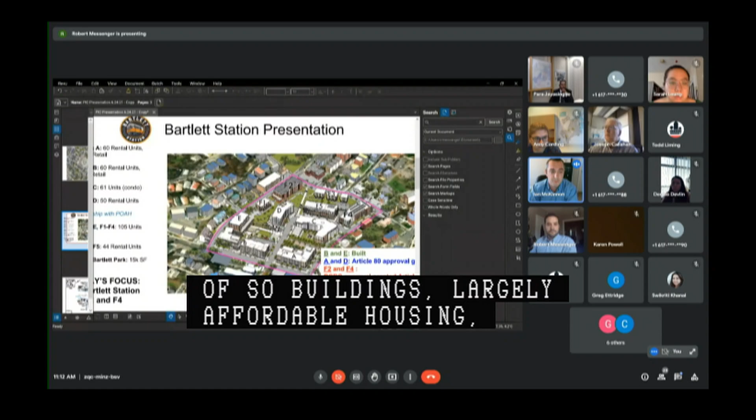During the planning and the TAPA process, the community and city identified a new traffic signal and safe pedestrian crossing at the site's new access point along Washington Street. The site roadway was built several years ago and will allow for the construction of the remainder of the site. We understand there are several other PIC petitions related to the site today, but today we're just focused on the signal infrastructure and the petitions related to that.

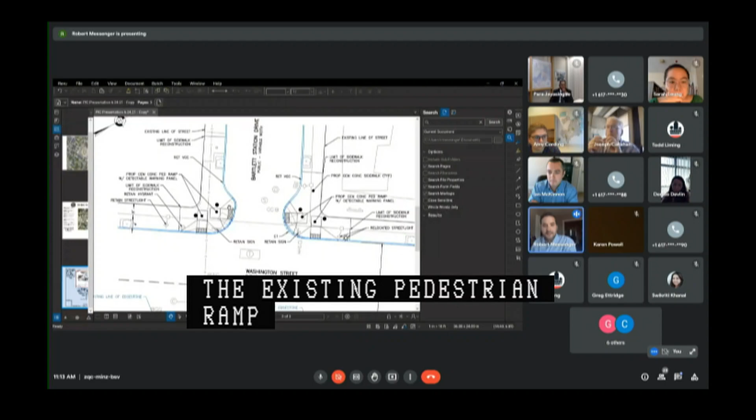On this side in Bartlett Station here, we are realigning the curb from existing to a proposed 10-foot curb radius. It was a little less in the existing condition. These existing pedestrian ramps were more of an apex orientation. We're straightening this out to provide a shorter and safer crossing. Also, we coordinated with street lighting. They are asking for a relocated street light here and to retain street lighting on this side. And any new BTD signals, they'll be outside of the pedestrian ramps or landings.

Moving to the St. James Street portion of the project. Robert, could you hold on for a second? Just noticed something. Can you go back to the segment? Right. So Robert, before the public hearing, please amend this plan so there's some notion of what the resulting widths are. Your Bartlett Station Drive, you are saying is a public way variable width. Washington Street, public variable width, and there's no indication as to the resulting net opening. So can you put some dimensions so we have some idea? Sure, absolutely. Thank you. Continue.

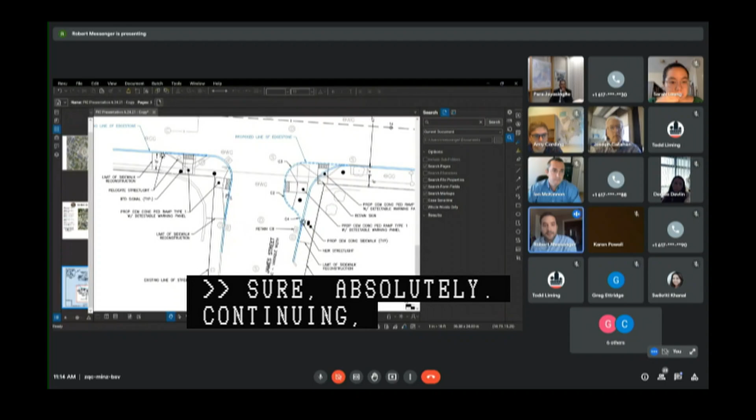Continuing on to St. James Street, similar stuff going on here. We're reconstructing the sidewalks, realigning the curbs, and new pedestrian ramps. On this portion, we are extending the sidewalk, so we created a bump out with 10-foot curb radiuses to shorten up this crossing here. There's an existing electrical duct bank which provided an obstacle. We couldn't shift this ramp any further because of that obstruction and manhole cover conflicts. Again, more street lighting, so we'll be providing new street lights on this portion of St. James Street and relocating a street light out of the pedestrian ramp along Washington at this portion of the intersection.

And again, what is the width? Yeah, what is the width? I mean, you are making it down. So this right here is 26 feet. It's not dimensioned on a plan, but I just measured it prior to. That's 26 feet? Yes, I believe. Okay. I'm a little bit caught off guard, but that's fine. I'll confirm and follow up.

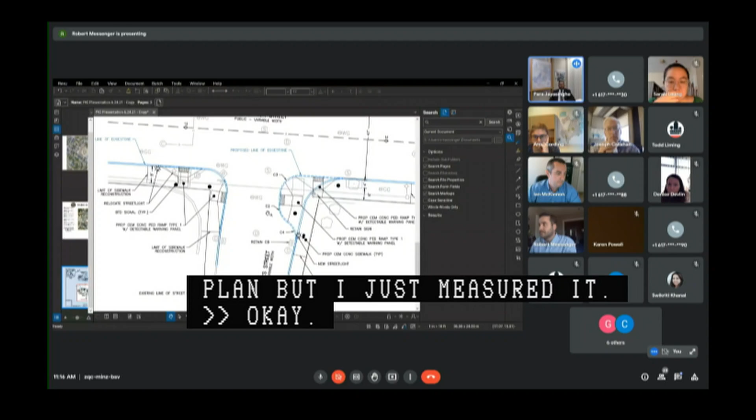Could you also please check those opening widths with the PIC staff and or Zach Wassmann, who is the Public Works Chief Design Engineer for the roads program? Because we do these daylighting on neck downs, we just want to make sure that there's effective net width for the future purposes of St. James Street. It's also good for you to tell us whether St. James Street is functioning as a one-way street or a two-way street. All of that impacts the functionality of that street when we do these neck downs. Sure. Okay. Thank you. Please continue.

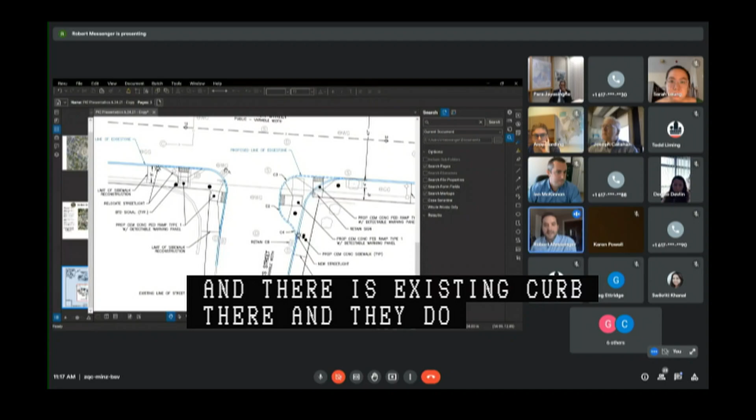And finally, the new street light at this corner, and there are existing Boston Water and Sewer drainage curb inlets. They do have gutter mounts, and they do look functional and not broken, so we'll be retaining those structures. And that is all. Thank you, Robert. Any comments by fellow commission members? I think when you are adding dimensions, if you could add dimensions for the pinch points that the relocated streetlights and signals are creating. Will do.

Bob, I just have one question. On the bottom left, the drain manhole, we just want to double check. It's right by the handicap ramp, and it's outside, not on the taper. Okay, this one here? No, if you go up, on the main road, the handicap ramp. Okay. Yeah, right there. So we did shift it. It's right on the edge, but we did shift the taper so it's not conflicting with the manhole cover. Okay, great, thank you.

Robert, further to the thinking of Ms. Devlin, on the right-hand side, right there, okay. So you said you are going around because there's a manhole, a utility, right? Who is that? To whom does that belong? It's electrical. I'm not 100% positive of the owner, but I can figure that out.

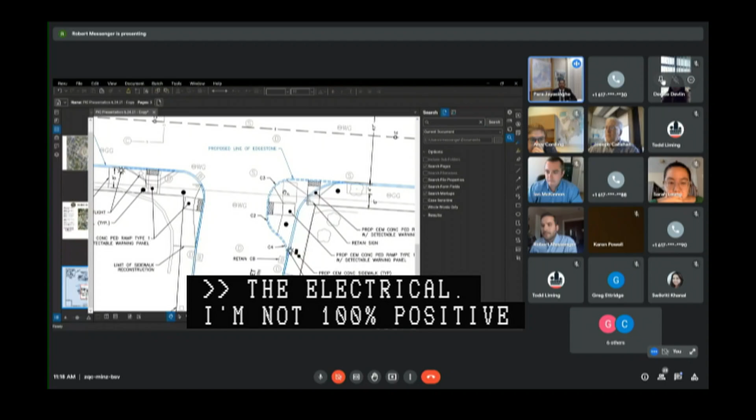A second, Robert. So if you're not aware of who it is, you need to find out to whom it belongs, because they may not be very supportive of you building right around that thing, right? I mean, what if it is an electrical board or whatever? I'm just guessing here. So you do need to find out who the heck owns that and make sure that they are okay with you constructing 8-inch edge stone around that. Yep. Okay, so there's a little bit of homework which you need to do so that PIC staff and commission member staff can review your plans appropriately.

Yep, we did do the coordination. We didn't get any objections, but I'll double check that they know, and I'll make sure that coordination's done. And also show on the plans through notation to whom it belongs. Sure. So that when the PIC commission takes action, it is not burdened upon us as to the work which you are going to do, which would be approved by the commission. Okay? Yep, understood. Just a little bit of homework.

And do please check with Mr. Wassmann, Zach Wassmann, that your neck down resulting widths are consistent with a variety of programs which the department is supporting in terms of slow streets and a whole bunch of other things. So we just want to do the same thing, but not cramp it in such a way that the St. James Street functionality gets messed up from here through eternity. Absolutely. Thank you, Robert. Any further comments by Commission staff? Hearing none, we will see you in 2 weeks, which would be July 8th.

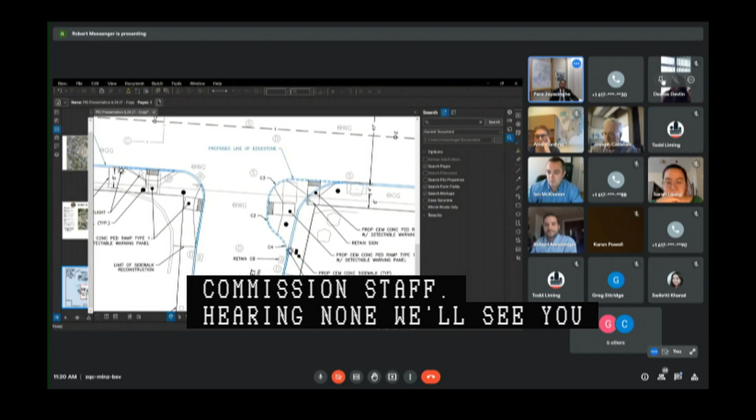Thank you. Fourth item on today's agenda, 41 Neptune Road, Lovell Street, East Boston, grant of location on a petition by Massachusetts Port Authority. Good morning. Do we have someone from the Port Authority, Massport?

Hello. This is Terry Rookard with AECOM, consultant to Massport. I know Greg Ettridge, the project manager, is on, but he must be having trouble with his audio. Hi Greg, I think you are muted. That may be the reason why we are not hearing you. But Terry, you can take it from here if you can control the screen. I do see Mr. Ettridge. He's just muted. Kathy Schaefer, the project engineer, is also on. Kathy, can you hear me? I can, yep. There you are.

Hi, Kathy. Given that Greg is not able to communicate, could you go ahead and just do an overview of what this petition is about, please? Sure, yep. I will share my screen. Kathy, if you could introduce yourself. Greg is with Massport, but I'm Kathy Schaefer, a civil engineer with AECOM. Thank you, Kathy. We can see your screen. All right, can you see my screen?

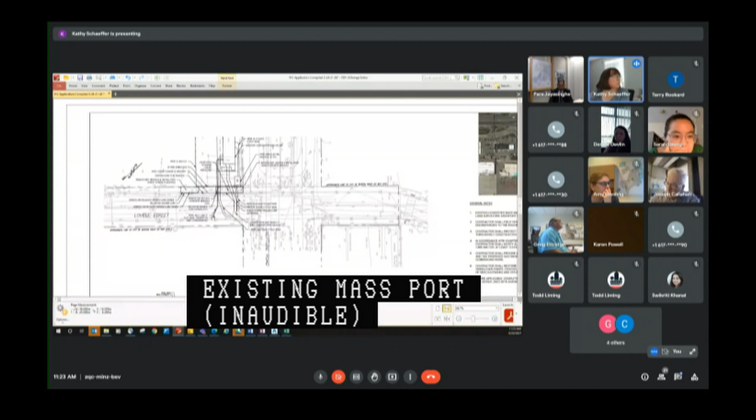So we have 3 new duct banks going to that manhole, and then there's a small communication duct bank going over to a communications manhole. And then we're reconstructing the sidewalk across the front of the parcel and providing a new driveway into the parcel for maintenance vehicles.

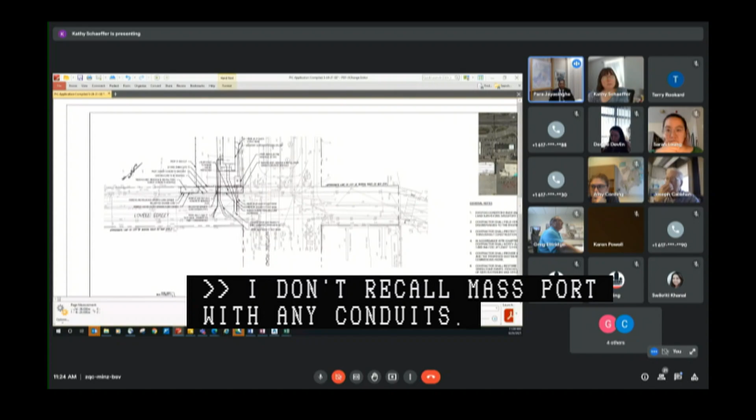Kathy, I'm caught off guard a little bit, and this virtual online communication leaves something to be desired. I'm going to ask you something which I really don't have an answer to. I don't recall Massport owning any conduits or duct banks that have been petitioned through the Public Improvement Commission, because I believe if you own any ducts, there's a protocol we need to go through so that you are registered with DigSafe and a whole bunch of other things. So can you shed some light on that, Kathy, so that I'm not babbling here like an idiot? Massport owns the duct banks that are in Lovell Street, I believe. I wish Greg could respond to that.

I believe that they're appropriately registered with all of our stuff. We've done other subsurface projects with them before, and I believe that they are appropriately in our system. Thank you, Amy. So they are registered with the cable office, all that stuff. All of that good stuff. Awesome. Thank you, Amy. Sorry, Kathy. Okay, that's okay.

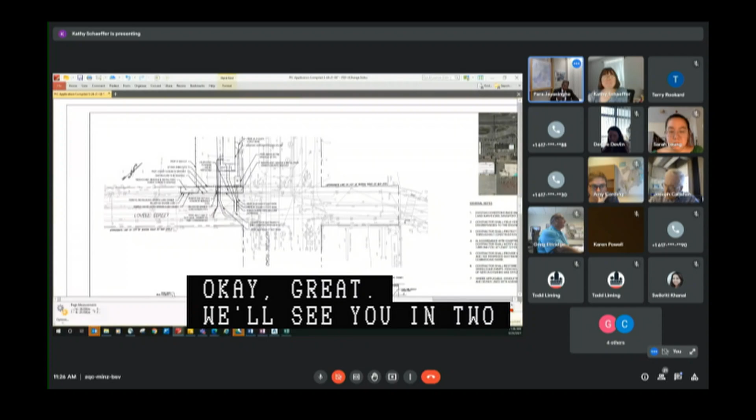I suppose this is fairly straightforward. Any comments or questions by commission members? Hearing none, and I believe my PIC staff is okay with things. Do you? Okay, let me see. Great. We will mark you up for 2 weeks. Okay, that's great. For July 8th. All right, thank you.

Fifth item on today's agenda, 233 Hancock Street, Dorchester, grant of location on a petition by Verizon New England Inc. Good morning. Is there someone from Verizon today? Good morning. Is there any person that is representing Verizon New England? If you are trying to speak, your microphone might be muted.

In the interest of time, let's move on to new business item number 6, which is 415 D Street, Summer Street, South Boston, grant of location on a petition by Crown Castle. Good morning, everyone. This is Brian Cunningham from Crown Castle. With me today is Anna Samashka, also from Crown Castle. Brian, you may need to speak up a little bit because I'm having difficulty and I'm not sure whether your voice is being captured. I apologize for that. Is this better? Perfect, perfect. Go for it. Thank you. Again, my name's Brian Cunningham, and with me today is Anna Samashka. We're both from Crown Castle.

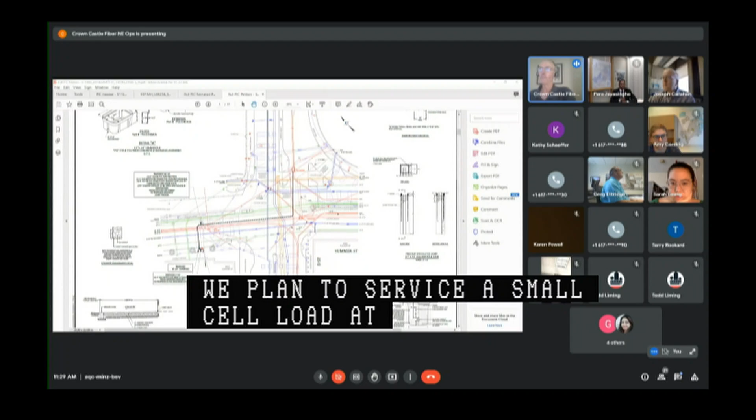Crown Castle is petitioning for a grant of location with lead company status and no participants for conduits to be placed on D Street and Summer Street in South Boston. This plan shows where we propose to place the conduit. We plan to service a small cell node at this location right here. The trench would be 245 feet to a handhole, a new handhole that we would place in the sidewalk next to the node, next to the light pole, into Summer Street. And just to orient you, this is Summer Street and this is D Street. We go into Summer Street, over to D Street, and into electric manhole 26686 in the intersection. At that point, we plan to lease duct from Eversource to get from this electric manhole to another electric manhole about 330 feet down D Street, where we have a fiber optic backbone that we'll connect to.

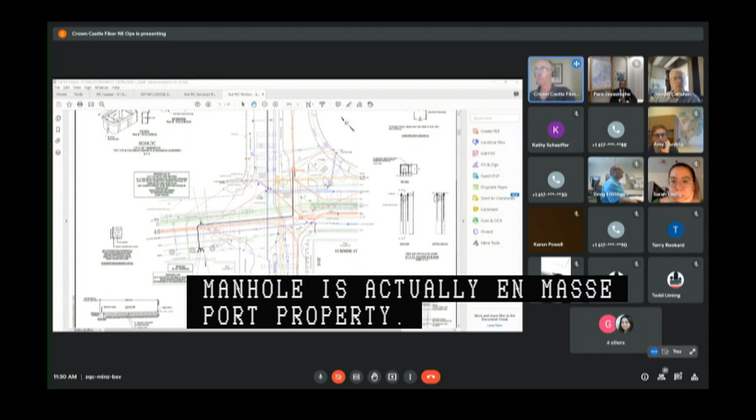In that trench, we would place three ducts, a 2-inch duct for power connectivity from the light pole up to the electric manhole, another 2-inch duct for our fiber optic cable from the light pole up to the electric manhole, which, as I say, we would then lease duct to get back to our backbone, and then a 4-inch city shadow duct with interducts inside of it. One thing I want to mention is that this electric manhole is actually in Massport property. The last about 13 feet of this trench would be in Massport property. Massport border is right about here. And we are in contact with Massport and working with them on the permitting for that portion of the trench. Are there any questions or comments?

Thank you. Any questions by fellow commission members? Hearing none. I believe PIC staff is fine with this item and there is no testimony, so we will mark you up for 2 weeks, which would be July 8th. We'll see you then. Thank you very much. Thank you.

Going back to new business item number 5. Sounds like the last roll call here. 233 Hancock Street. Is Verizon here with us today? I believe they are not here. Todd, if you could send a message to all of us, verifying that there is no Verizon here. Wonderful. So, Todd, if you could let Verizon know that they or their representatives failed to attend today's hearing. That should conclude today's business.